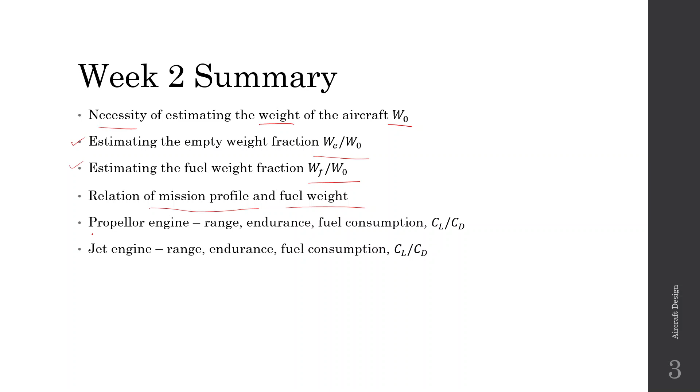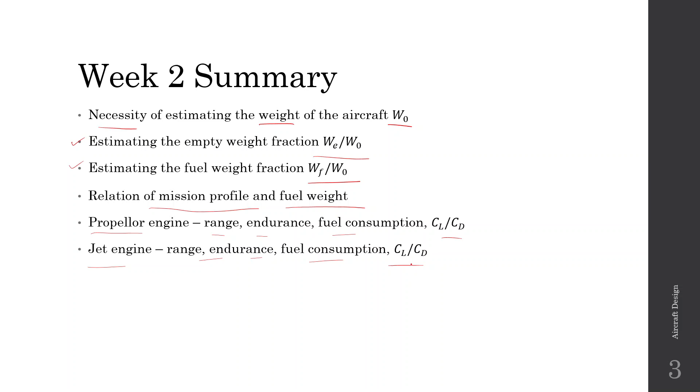And then we'll study propeller engine and jet engine - what is the range, endurance, and how to maximize these quantities. We'll study about the fuel consumption, and also what is the CL by CD that the aircraft must be flown at to maximize these quantities.

So first, we'll study what is the necessity of estimating the weight. You must understand that here we are talking about aircraft design. So on a blank page we are designing an aircraft, creating a new aircraft. So obviously when we are creating a new aircraft, we must know its size, its weight - these things. So the weight is very important to estimate, or not really estimate, but decide.

It is important to decide the weight class of the aircraft, because if the aircraft is heavier, then its size will also increase. The wings must be bigger, the engine has to be more powerful, it will have larger fuel tanks. So the weight is a very important thing to decide.

So the total weight of the aircraft can be broken down into its components. The total weight W naught can be written as weight of the crew plus payload plus fuel plus empty weight. The empty weight is the weight of just the structural components, because the empty weight is the weight without all these - crew, payload, fuel.

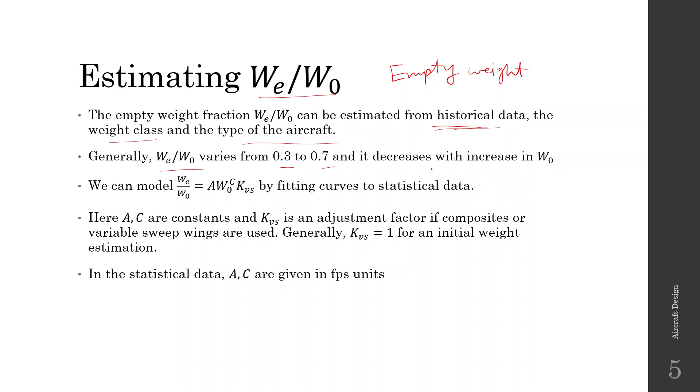So the empty weight fraction WE by W naught can be estimated from historical data, the weight class, and the type of the aircraft. Generally this ratio varies from 0.3 to 0.7, and it decreases with increase in W naught. What this means is that it is generally more efficient to build a larger aircraft.

So if I return back to this equation, your crew, payload, and fuel. Crew and payload are the important things that we care about, and the fuel is required to run the engine. But your empty weight, this is the weight of the structure, so in a way this is not really helpful.

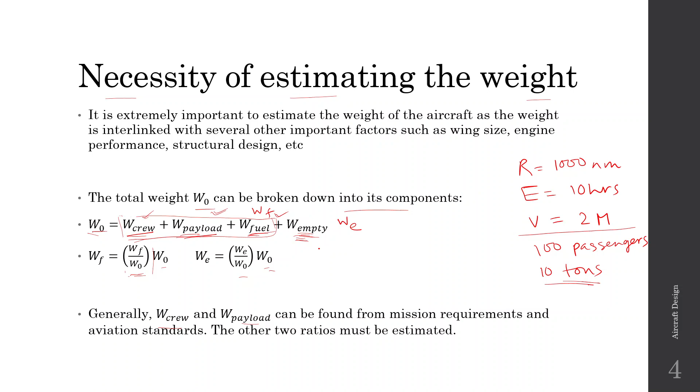So if we can minimize the empty weight, it is better, because the empty weight is a weight that we are carrying just to support all these things. It is not of use, it is not something useful that we are carrying. So we would like to minimize the weight, or specifically minimize the fraction of the total weight that is empty.

So what we can see is that this ratio decreases with increase in W naught. It means that if we build a larger aircraft, like if we carry a lot of people at once or a lot of cargo at once, like the commercial airliners, then their empty weight fraction is lesser. But if we build a smaller aircraft which carries a small amount of people and cargo, then their empty weight fraction is higher, so we are carrying a lot of structural weight.

So we can model the WE by W naught using this kind of equation by fitting curves to the statistical data. This equation is not really derived from any kind of physical laws, like it's not derived from a free body diagram or Newton's laws or something. This is simply, let me show you.

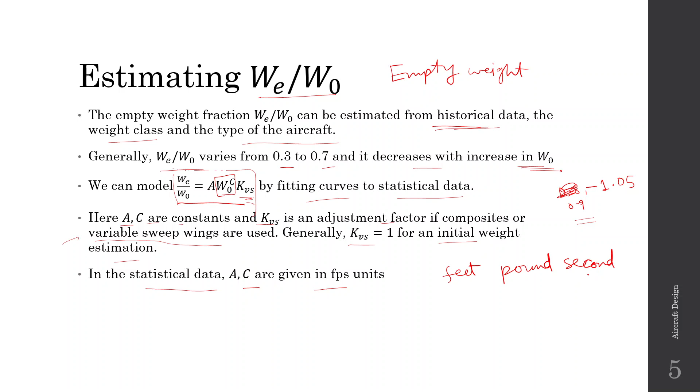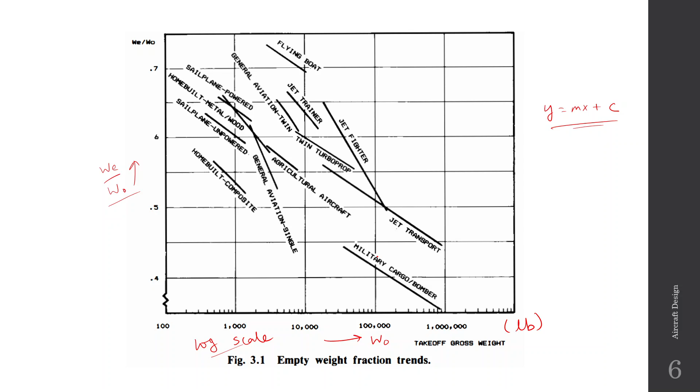You can see over here these are generally small planes - sail plane, home built metal wood sail plane, home built composite, flying boat - so these are all small planes. There you can see that the empty weight fraction is higher. So these planes carry a lot of structural load and less cargo load.

Whereas if you see over here, you have jet transport, military cargo, and bomber aircraft. They are very heavy, but they carry lesser empty weight - so they carry lesser structural load and more cargo and fuel.

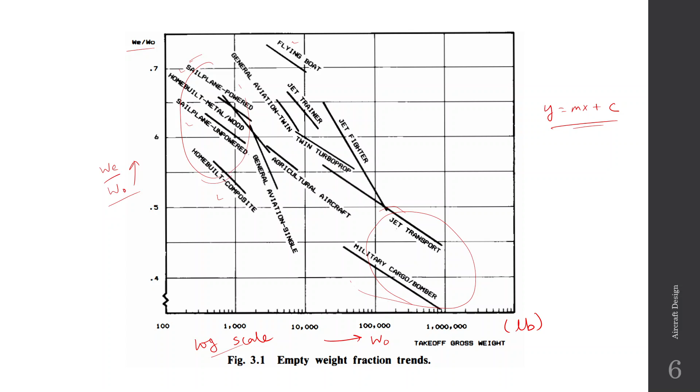So this is empty weight fraction versus W naught, for different types of aircraft. As I said, KVS is the variable sweep constant - 1.04 is variable sweep, and 1 is fixed sweep. You can see that KVS is almost 1, and you can assume 1 for initially deciding the weight.

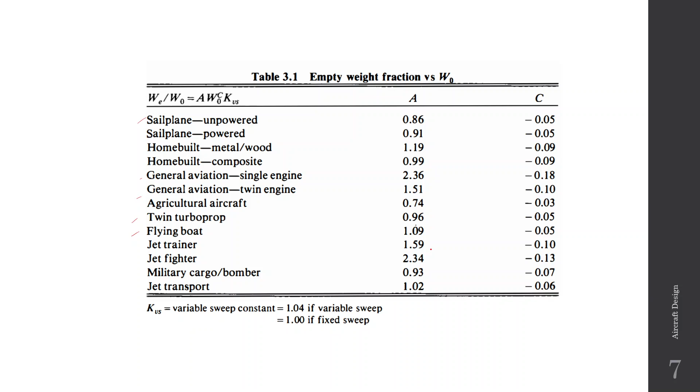So now moving on, that was estimating the empty weight, but estimating the fuel fraction is even more important - both are important, but estimating the fuel fraction takes more work. The fuel fraction of the aircraft obviously depends on how fast, how far, and how long the aircraft must fly. If you have a car, you can guess that if you go very fast, the car will consume more fuel, and if you go for a long distance, more fuel will be consumed.

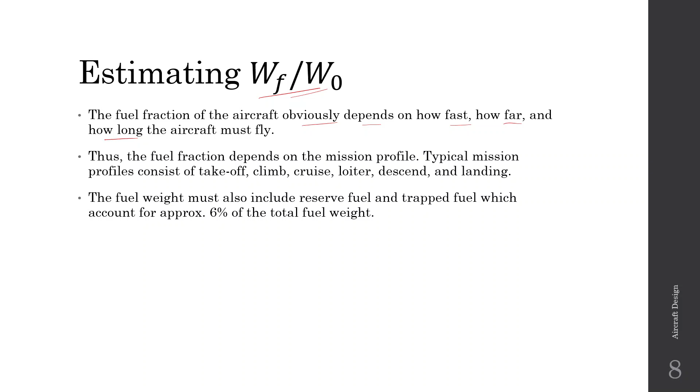Also, let's say you don't go for a long distance, you go in circles in one place, but you do that for a long time - then also a lot of fuel will be consumed. So the fuel fraction depends on the mission profile, and typical mission profiles consist of takeoff, climb, cruise, loiter, descent, and landing.

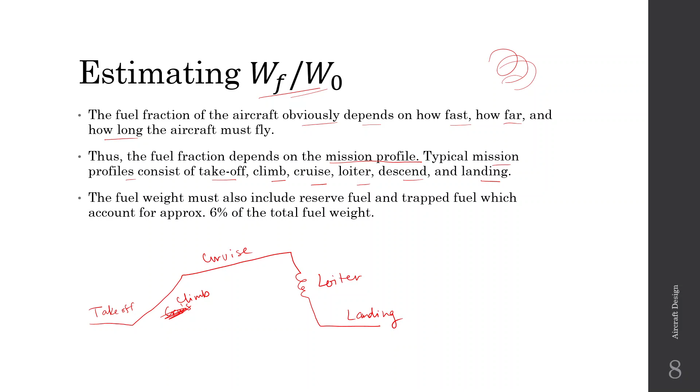So this is the most basic kind of mission profile. There are other kinds which I will discuss. Cruise and loiter, they consume the most amount of fuel, because takeoff will take 5 minutes maximum, landing will take 5 to 10 minutes, but cruise can be for hours, and loitering can also be for hours. So these are the primary components which consume the most amount of fuel.

So we'll study primarily the fuel ratio for cruising and loitering.

The fuel weight must also include reserve fuel and trapped fuel, which account for 6% of the total fuel weight. When you're flying, you must always carry some fuel for emergencies. For example, you're going to land in some airport, but the weather is not good, and you have to divert somewhere. Or there is some problem because of which you cannot fly at an efficient speed, then you will consume more fuel. So you need some reserve fuel to account for that situation.

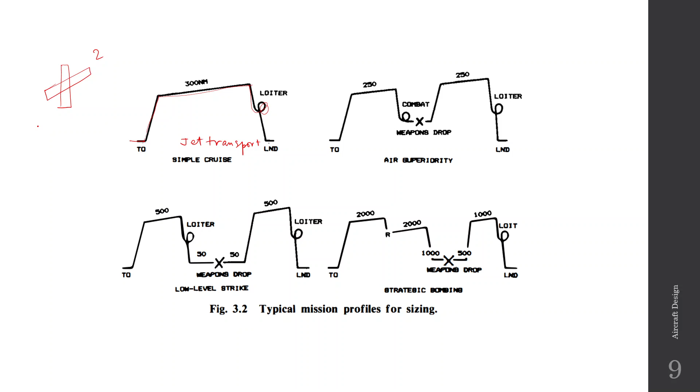If you consider Delhi airport, it is the capital city, so a lot of aircraft are coming to Delhi from within India and outside India. But Delhi airport might have, let us say, a maximum of four runways, so only four aircraft can land at a time. But what about the other aircraft? What they do is they come and loiter about Delhi, flying in circles above or nearby Delhi, and they wait until one of the runways is available. When the runway is available, then they come and land. So this is the loitering phase, also known as a holding pattern.

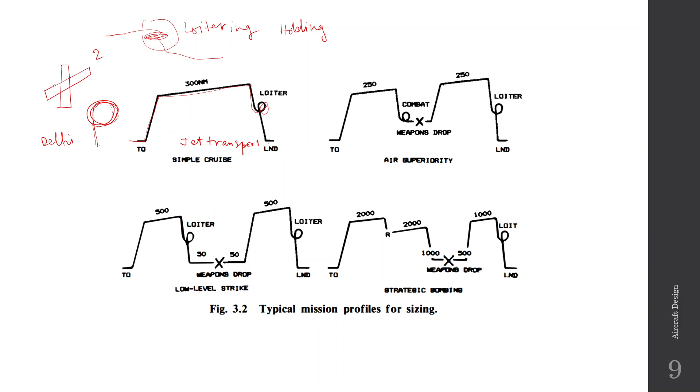So after loitering, it lands. Next could be a mission consisting of takeoff, cruising, and then combat. This is a civilian mission profile, but the rest are military mission profiles. So you descend to some place and then you fight with some other aircraft, and you drop some kind of weapon or bomb, and then you again climb up, cruise, and then come and land. So one thing is, why are you going up to this kind of altitude?

Like why can't the mission profile be like this, you are going up, coming down, going up, coming down? This is because it is more efficient to fly at higher altitudes. So we fly at high altitudes, but when we have to fight, we come down to lower altitude. You could also have the combat at high altitude, but this profile is just for example purposes.

Then we have a low level strike mission. In this case, we again take off and then cruise, and the requirement is low level strike, which means we have to fly under the air detection radar.

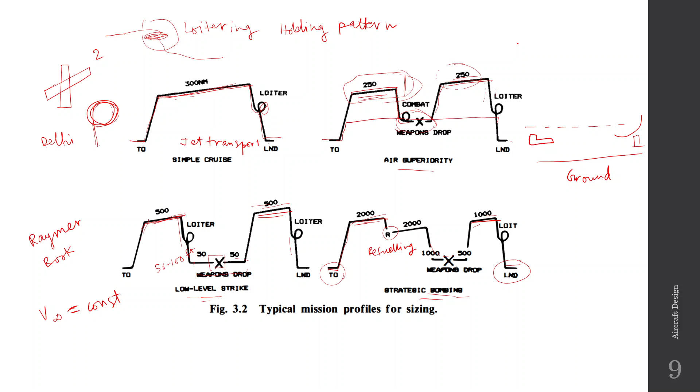Yes, you are right. If your aircraft is losing weight and increasing in altitude, it is going to fly in the most fuel efficient manner. But in real life this is not possible, and it's not permitted actually, because you have to maintain separation between other aircraft. So what I read is that aircraft fly in some kind of a staircase pattern. If it is a very long distance aircraft going to some other country or continent, it is permitted to fly in a staircase pattern - for some time it flies in a region, and then it's permitted to increase its altitude.

But in this chapter, we are going to assume that your V infinity is constant. So if you want to fly at the same level, but the weight is decreasing, then you have to reduce your V infinity. So if your aircraft is getting lighter but you want to fly at the same altitude, you have to decrease your V infinity.

But in this chapter, we'll assume that V infinity is constant. So if your V infinity is constant, then you will gain altitude - you will climb.

So Aditya has a question: why doesn't the bomber get to a higher altitude after refueling, although it's more efficient? These mission profiles are obviously very simple, and they're just for illustrative purposes. After refueling, it could have gone higher also - I don't know why it is drawn like this.

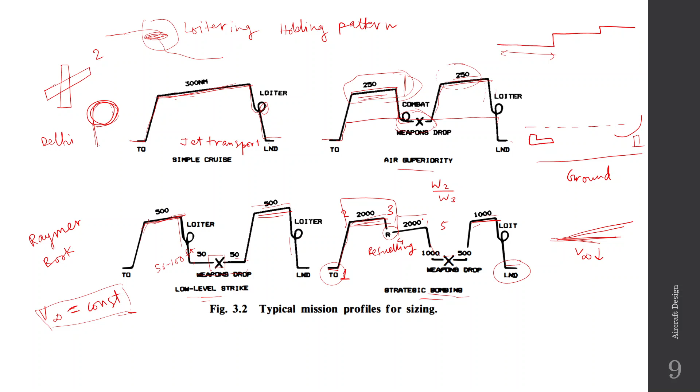You will actually also consume fuel for the climb phase. The climb phase is not instantaneous, obviously. The climb and descent phases take a significant amount of time, and fuel is also consumed during these stages. This is discussed in the book, you can refer to it. I think sir has not discussed it in the lecture, so here I'll talk about the cruise phase.

So this is the range equation, and you can invert this equation to get the weight fraction. So this equation will give you W3 by W2, the weight at the end divided by the weight at the beginning.

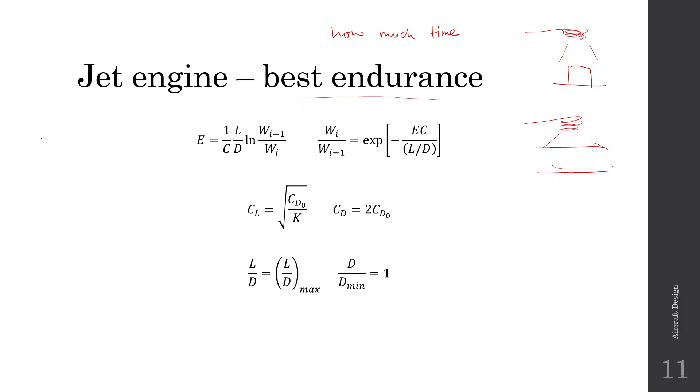Now there is another concept called high altitude aircraft, which is a replacement for satellites. So you know that if this is the surface of the Earth, then satellites are very far up, and they are used for communications between various points on Earth. There is a new concept coming up where we fly a high altitude aircraft, let's say at 15 kilometers, for a long duration of time, and this aircraft can now also provide communication between different points on Earth. So this is called a pseudo satellite.

And of course, if you want to do this kind of thing, you will have to stay up in the air for a long amount of time, many hours. So in those cases, we don't try to optimize for range. We have to try to optimize for endurance.

So the endurance is given by this formula. We know all the quantities, so again you can invert that to get this.

Now one easy thing is that, in this chapter, since we are assuming that the velocity is constant, you can multiply the endurance with the velocity to get the range. Like you can multiply the endurance formula with the velocity to get the range. So here you can see that I have just omitted the v. Rest of the formula is the same.

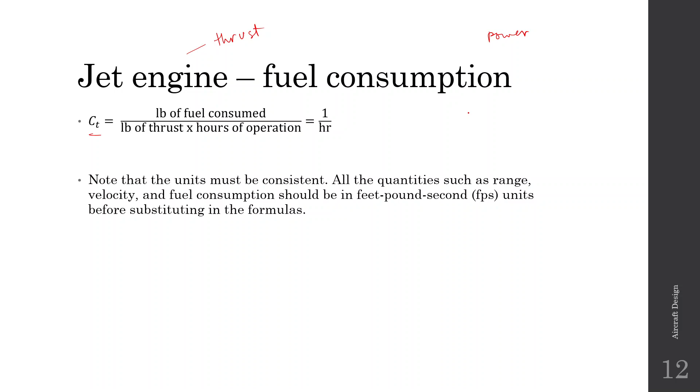So this fuel consumption is measured in terms of thrust, and it is also written as CT. So this is, if you write it explicitly, pounds of fuel consumed per pound of thrust and hours of operation. So let us say that you take a jet engine and you run it for 5 hours, and you measure the thrust produced, and you also measure how much fuel it has consumed. Then if you put all those quantities into this formula, you will get the CT value.

So let us say that it has consumed 10,000 pounds of fuel. You will put 10,000 over here, then you will write the thrust T, and then you will write hours, so 5 hours of operation. By doing all this, you will get the CT value.

And your CT for a jet engine is measured in 1 by hour unit. What I mean is that obviously you can measure it in any time format, right? You can measure it in seconds or hours or days, whatever. But the available data or statistical data or specifications are available in 1 by hour unit.

So one thing you have to note is that in the previous formulas that I discussed, all the units must be consistent. The units have to be the same. So all the quantities such as range, velocity, fuel consumption should be in feet pound second, FPS units, before substituting in the formulas. Now see, they can be in any units. If you are using SI units also it's okay, but all of the quantities have to be used and written in SI units.

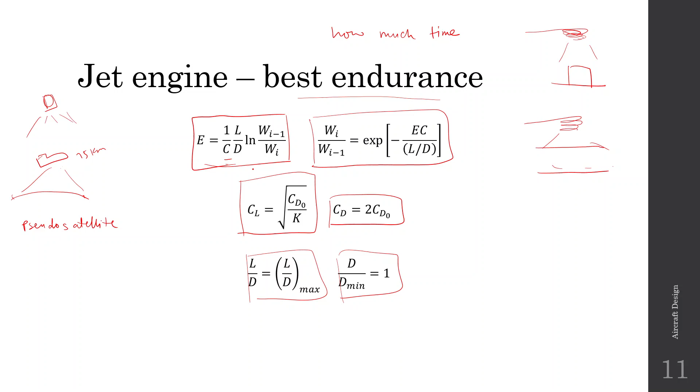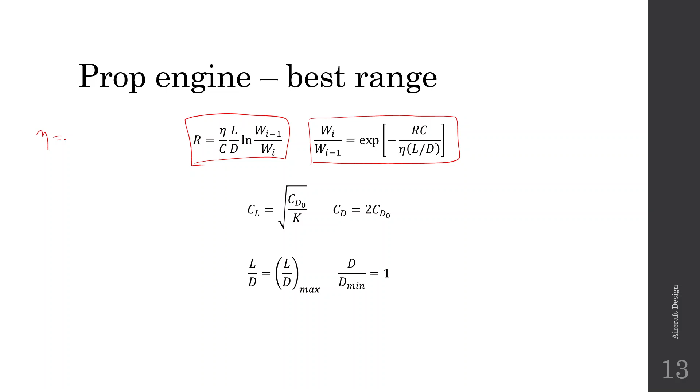Now I will come to the propeller engine. So in your propeller engine, the range formula is given as this, and if you invert it, you get the weight fraction. So over here, your eta is your propeller efficiency factor, and C is your specific fuel consumption. I'll discuss more about C later, because in a propeller engine, your C is more complicated to deal with.

Now for best range, you must fly at this CL, which will cause maximum lift to drag. Then your CD is given as this. Your lift to drag is equal to the maximum lift to drag, and the drag is the minimum possible drag.

Now coming to the endurance, again you can see that here, since we have considered the velocity to be constant, you can divide the range by the velocity to get the endurance formula. There is no velocity term here, so if you divide by v, you will get another new term. So this 1 by v term has come here.

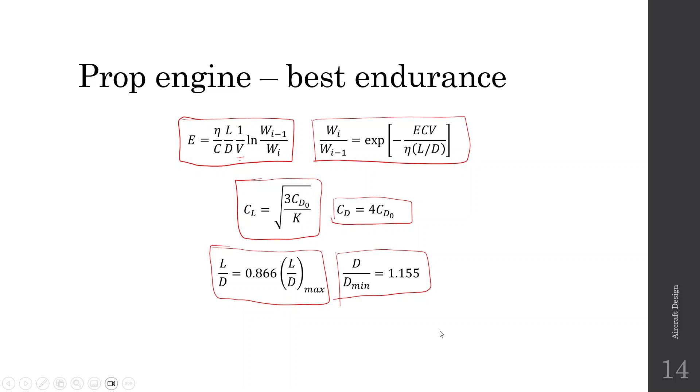So then we come to the fuel consumption parameter for a propeller engine. We know that the propeller engine deals with power and not thrust, so we talk about power in case of propeller engine. That is why the fuel consumption parameter is somewhat like this: pounds of fuel consumed divided by horsepower produced at the brake and hours of operation.

If this is your prop engine and this is your engine shaft, this is known as the brake. Again, same process: if we run the engine for 5 hours and measure the power produced at the brake of this engine, and also measure the fuel consumed, then you put it into this formula to get the CBHP. Your CBHP is measured in pounds by horsepower into hour.

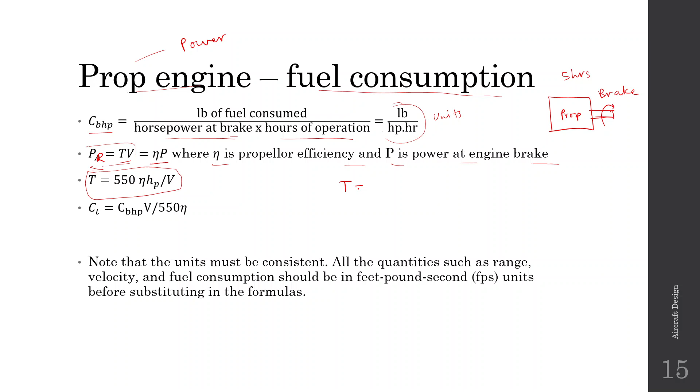How do we get this formula? We just take this formula: P equal to TV. So from there you can get T equal to PR by V, and then you put in your eta HP.

Now the thing is that if your units have to be consistent, then your power has to be measured in pound feet per second, but usually power is reported in terms of horsepower. So 550 is a conversion factor between the units, this 550 number comes by converting the units.

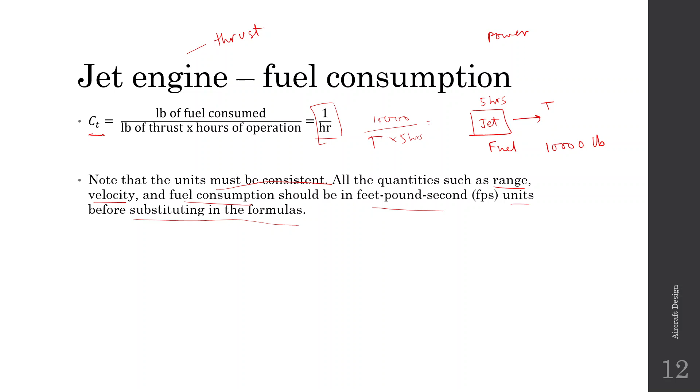Similarly, for the case of jet engine, CT was the fuel consumption with respect to thrust. So we can derive an equivalent CT for propeller engine. This is useful for comparison purposes.

If you have to compare a propeller engine and a jet engine, the fuel consumption, you can use this CT value. Now, you have to remember very importantly that your CBHP should be in the horsepower unit. If it is not, then the 550 factor will not come in; it is just for unit conversion. You can also see that the CT factor depends on the cruise velocity. In case of jet engine, this was independent of velocity, but in case of propeller engine, it depends on velocity.

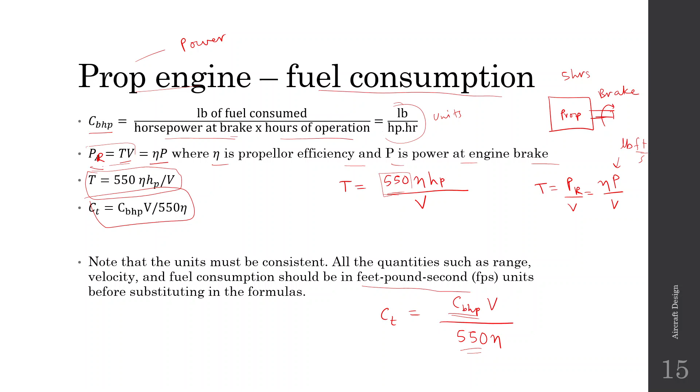Now this is some specific fuel consumption trends. This is CT, you can see it's written here as equivalent jet SFC, and the unit is pound per hour per pound. This is CT, and this is Mach number, and these are for different types of engines.

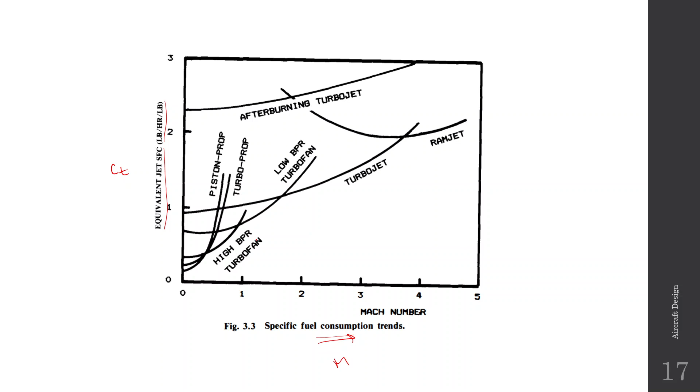This is another slide just for reference, you can also find this in Raymer's book. Now I'll discuss some simple examples. So this is the first question, please solve.

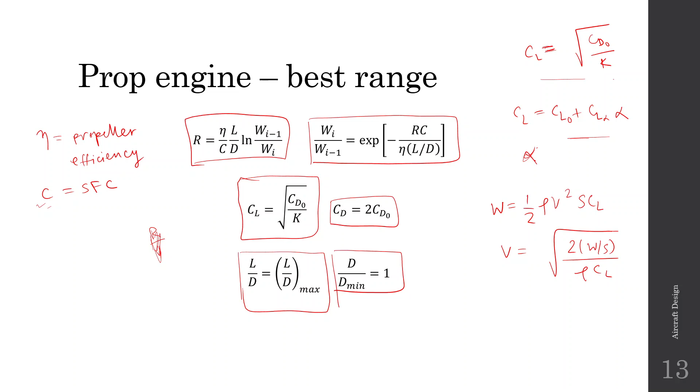Now let me give an example of something that is not an aircraft - consider an arrow, or let's say just a stick. A stick has its CG at the center, and because it's symmetrical, its aerodynamic center will be somewhere there too, not very far from the CG. If you throw the stick, there's a chance it will fly unstably - it might rotate through the air. But if you put some fins at the back, they shift the aerodynamic center back. The CG remains approximately the same, but the fins shift the aerodynamic center back, and then the stick, now an arrow, flies stably through the air - it doesn't flip around or rotate.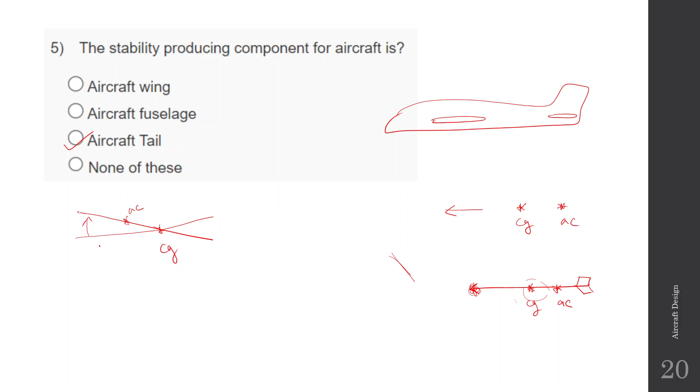Now why is this the case? Let's say you have an object with its CG here, and the aerodynamic center somewhere in front. If this object deviates a little from the flight path - this is your velocity - this deviation causes more lift, which causes it to turn more. So in the next instant it becomes like this - it deviates more and becomes unstable.

Whereas if your aerodynamic center is at the back, and suppose there's a deviation, this lift causes it to return back to its original state. So for any general object, if your aerodynamic center is behind the CG, it flies in a stable fashion - so for aircraft also, this condition must be satisfied.

Your aerodynamic center has to be back of the CG. Now what happens is that since your wings carry most of the load of the aircraft, they are located approximately close to the CG. So if your CG is here, the wing's aerodynamic center will be somewhere over here, usually a bit forward of the CG, but very close.

This configuration is either unstable or it may be neutrally stable. It may be just stable or just unstable, it's not really sufficient. But when you put a tail at the back, the tail acts like these fins.

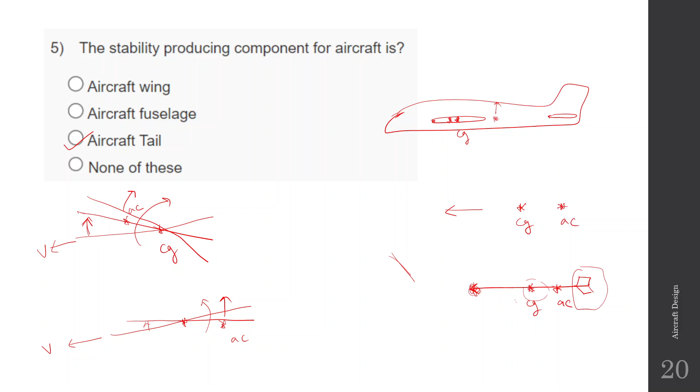And the further away the tail is, the more stable it's going to be. But of course, you do not want very high stability, because then it is impossible to intentionally move it.

This is the next question. So your weight is 1000 kg. Let me calculate. So this is the closest one.

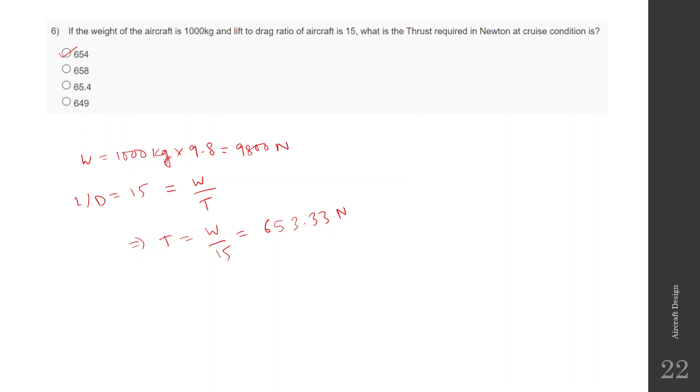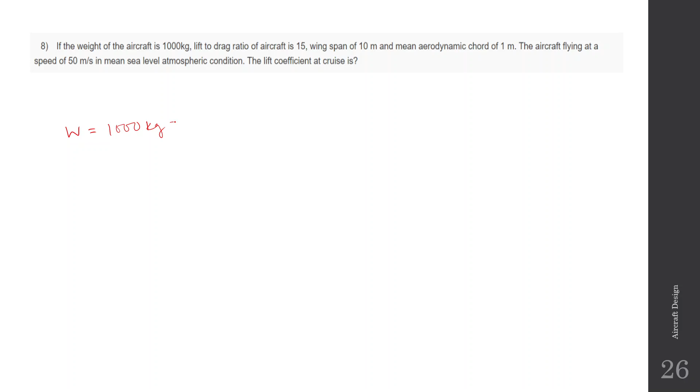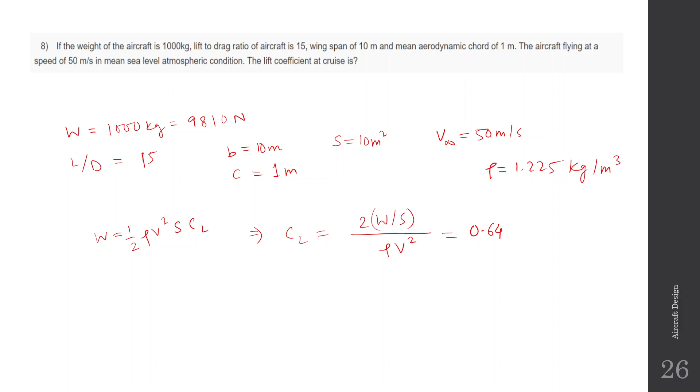This is the next question. So, sea level atmospheric conditions, so your rho is 1.225 kg per meter cube. Now moving on to the next question.

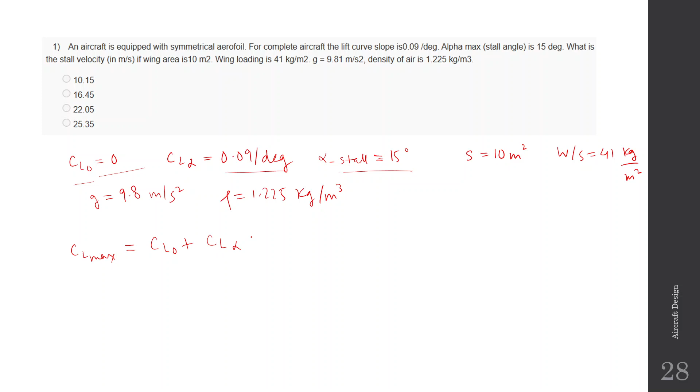So your alpha stall is 15 degree and your CL alpha is 0.09 per degree. And this is a symmetric airfoil, so CL naught is 0. So what you can simply do is find the CL max. CL max is going to be CL naught plus CL alpha into alpha stall. So this is 0.09 into 15, giving 1.35. So then your V stall...

Over here in W by S you have to multiply by G, because this is in kg per meter square, but you have to write it in Newton per meter square. So I get 22.055 meter per second. So this one.

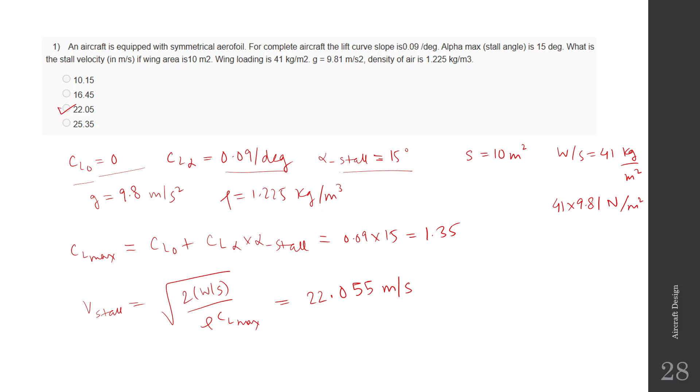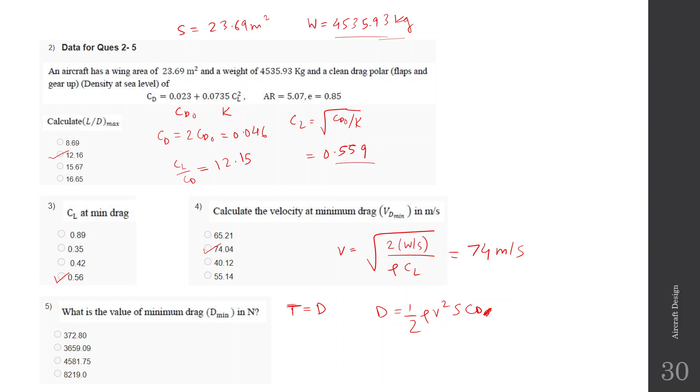What is the value of the minimum drag in Newton? Remember that this also means the value of the thrust in Newton, because in cruise condition, thrust equals drag, so your engine must produce this much thrust. So again we can calculate it from half rho v square S CD.

So this is 3659 Newton.

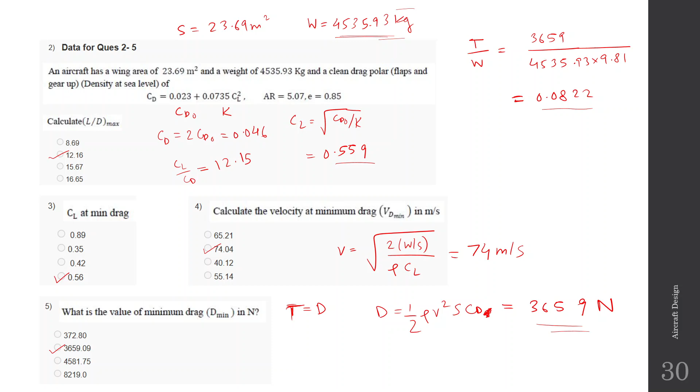This is the next question.

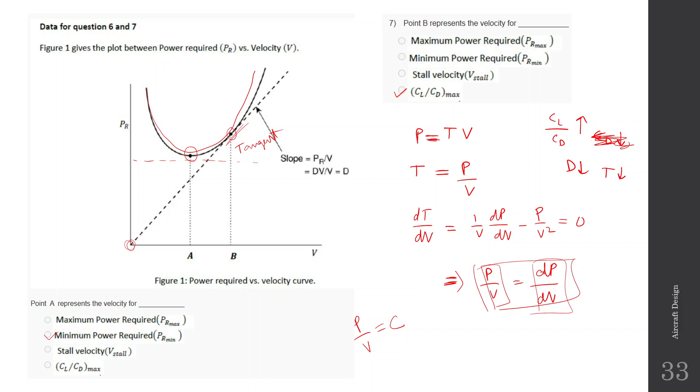Okay, so this is the next question.

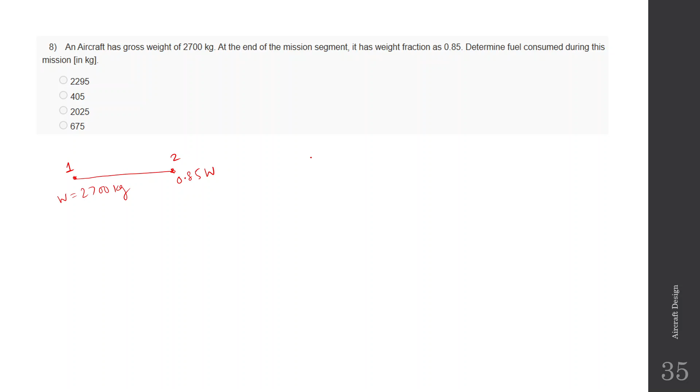We'll assume the change in weight is because of the burning of fuel, and there are no other factors. So the fuel consumed will be the weight at point 1 minus the weight at point 2, which is W1 minus 0.85 W1, giving 0.15 W1. Substituting the value of 2700 kg, this gives 405 kg.

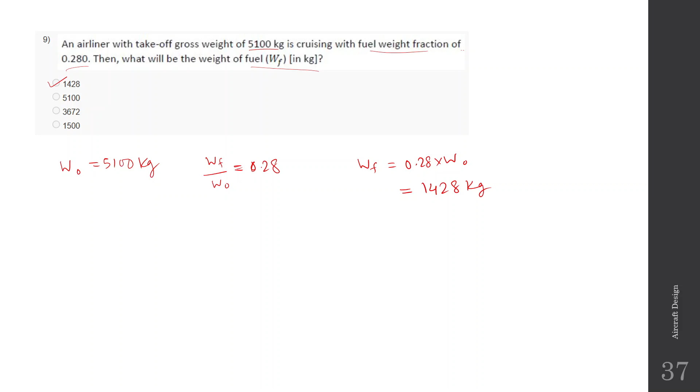Now I am going to discuss a problem which sir has discussed in class. I'll discuss the same problem; if anybody has questions, they can ask me. In this question, there is an aircraft which has to cruise, has to perform a cruise mission, and you are given this information.

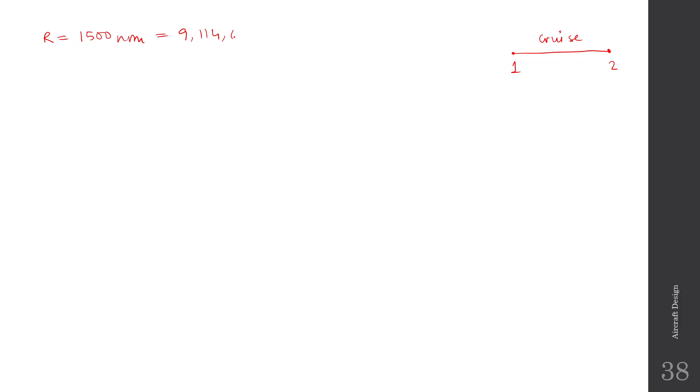The range is 1500 nautical miles, which is equal to 9,114,000 feet. The cruise velocity is given as 0.6 Mach, which corresponds to 0.6 into 994.8 feet per second.

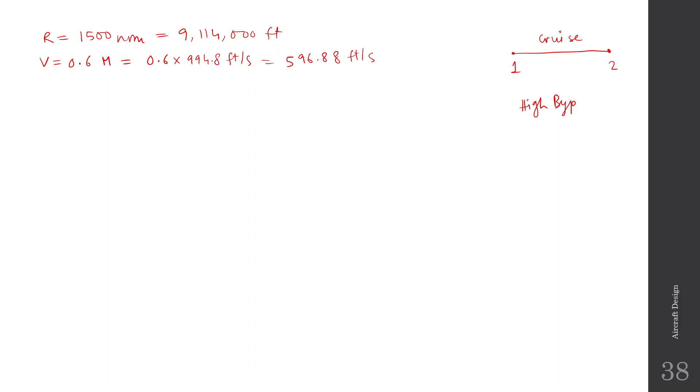This works out to 596.88 feet per second. This is a high bypass jet engine, so CT is given as 0.5 per hour, and we have to convert it into per second, bringing all the units into FPS. This is the data specified in the requirements, and for this I am using historical data.

So this turns out to be: you divide by 3600, and we get 1.389 into 10 to the power minus 4 per second.

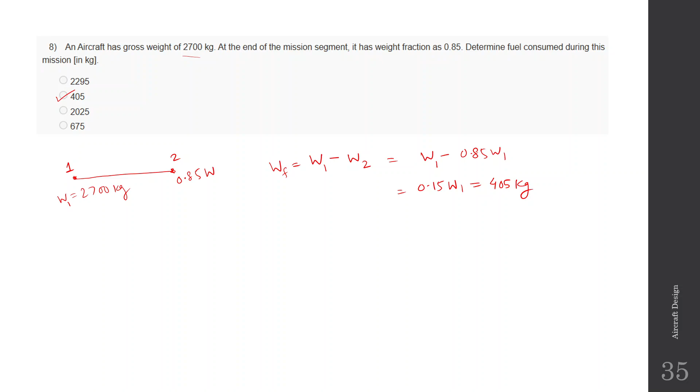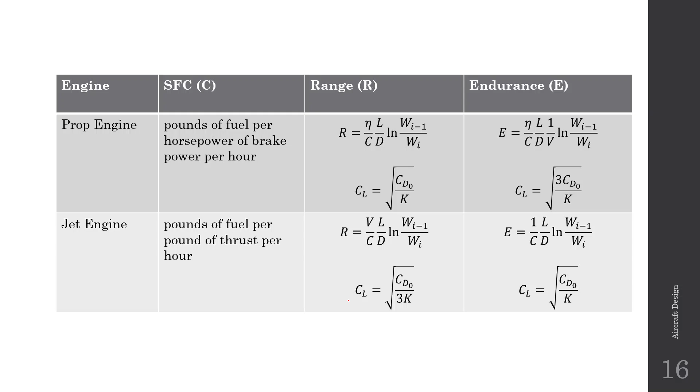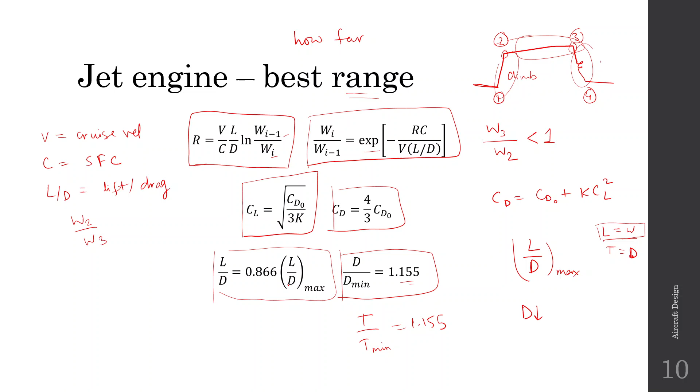When cruising with a jet engine, we don't cruise at L by D max, we cruise at 86.6% of L by D max. A high bypass jet engine has a C value of 0.5, in units of 1 by hour. We know that for a jet engine, to maximize range, we fly at 0.866 L by D max. Here I am writing L by D max is 16.

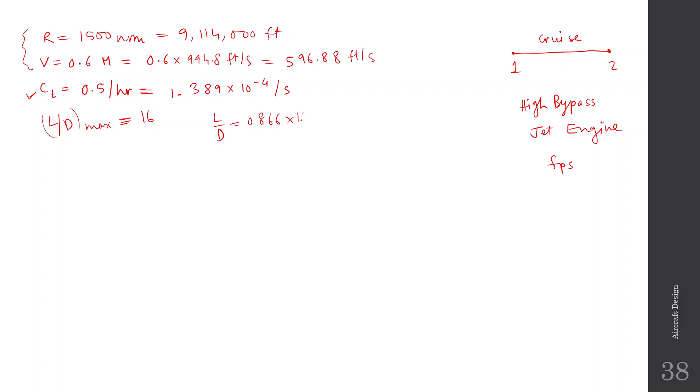Now we have to find the fuel fraction. L by D max is 16, so L by D is 0.866 into 16, which is 13.86.

Then we can use the range equation: Range equals V by C, into L by D, into ln of W1 by W2 — wait, this is W1 by W2. Now we can invert this equation to get W2 by W1.

Now all the units are consistent, all in FPS units, so you can substitute into the formula to get the answer. Your range is 9,114,000, CT is 1.389 into 10 to the power minus 4, velocity is 596.88, and L by D is 13.86.